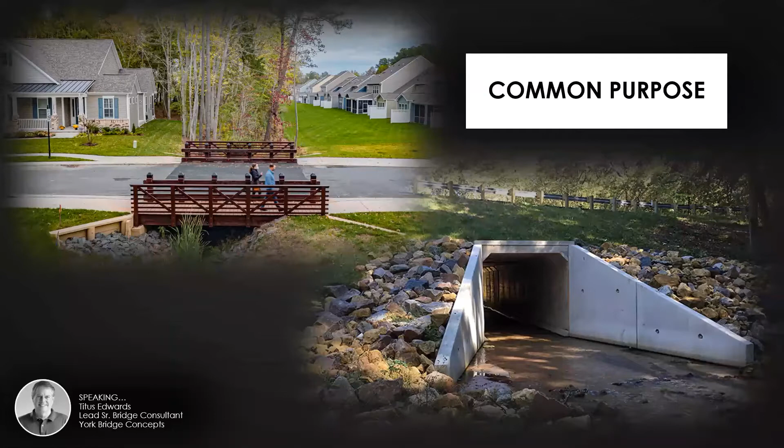And that kind of makes sense because culverts are typically the go-to pitch for an engineer when they have a crossing. I mean, after all, a culvert is typically looked at as the best type of crossing. It's simple, it's easy to install, it's cheap, there's no maintenance. We just throw a culvert in and move right on down the road.

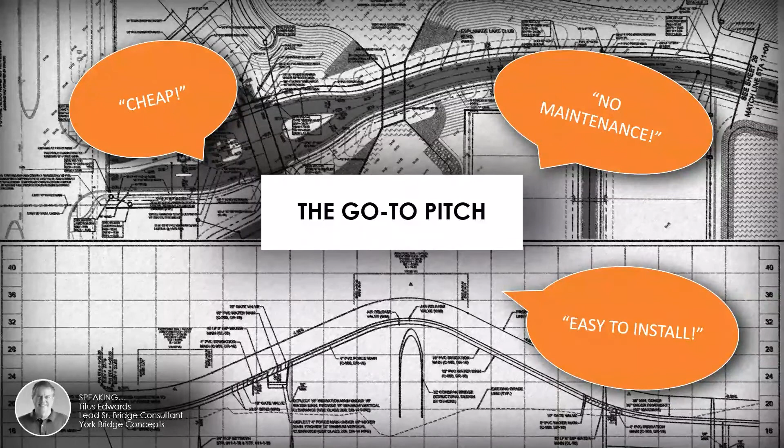In some cases, in many cases, that is true. If you have a small, insignificant crossing, sure, just throw a pipe in there, throw a box culvert in there, fill over it, and continue on. That would be a simple and easy way to go. But if you have a sensitive wetland, a larger stream, sensitive streams, now you may be looking at larger open culverts, arched culverts, bottomless culverts, and things may change. So you may want to consider a timber bridge, especially in those cases.

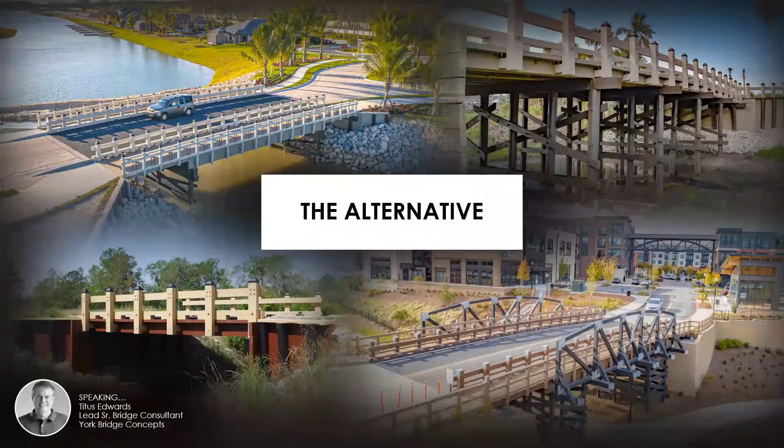And so today, I want to talk to you about some considerations that you may want to think about before choosing a crossing method, culvert or bridge. Well, the first point I want to make has to do with the environmental impacts.

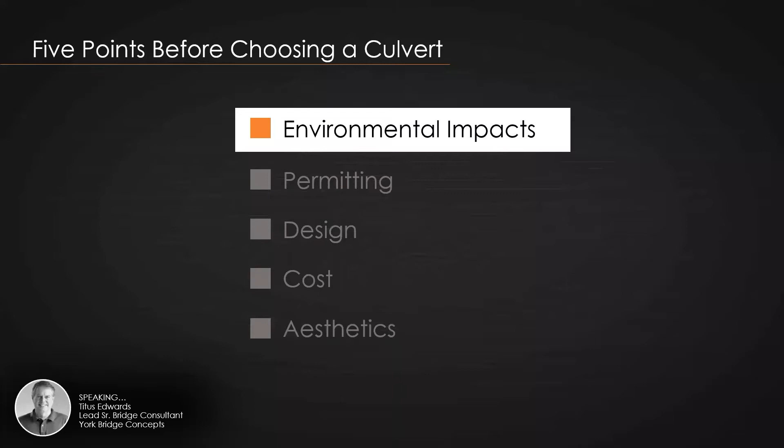First of all, from the production of the material. When you're dealing with culverts, you're talking normally about steel or concrete. Look at the factories where these materials are produced, the tremendous amount of greenhouse gas and carbon emissions.

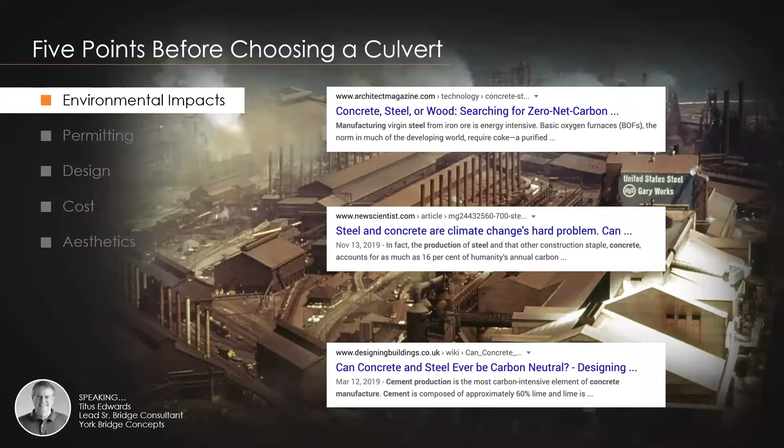The environmental impact of the production of the material itself is quite massive. But when you're talking about a timber bridge, you're talking about something natural and organic, very green friendly. The lumber comes from managed tree farms, and as we know, trees growing are very good for the environment, absorbing carbon dioxide from the air. So with a wooden bridge, you're using a material that's renewable, natural, organic, with a very small carbon footprint.

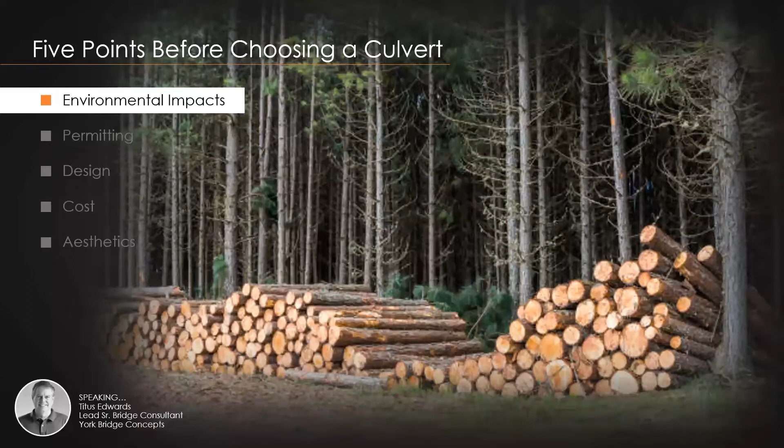But the second angle of the environment I want you to consider has to do with the installation of a culvert versus a bridge. Here you see a typical box culvert or multiple box culverts being installed for a stream crossing. Notice the massive impact of the crossing, where they've had to build cofferdams, dewater, put down a gravel base. You see the large equipment running through the crossing. It's a tremendous amount of impact to the crossing.

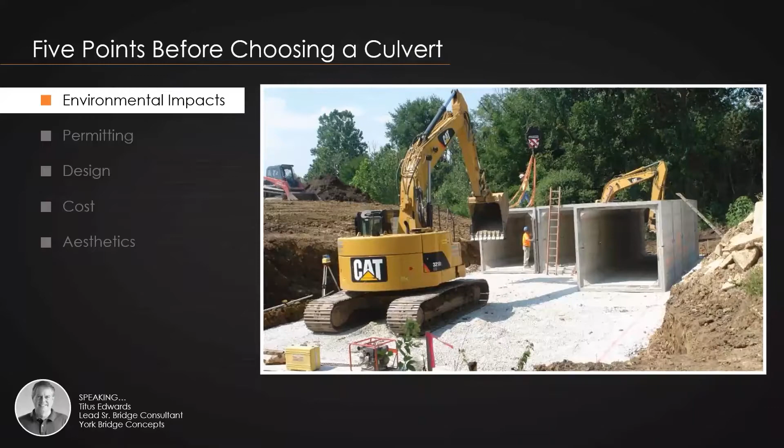But when you're talking about a York timber bridge, you're talking about timber piling supports. It's a very minimal impact to the crossing. So it's therefore much more environmentally friendly to install.

What you're seeing is a slide done by Eric Lass. Eric is a civil engineer we work with quite a bit out of Massachusetts, and he does a lot of solar farm projects. He was asked to evaluate box culverts, arched metal culverts, and timber bridges for these solar farms. Most of these were simple wetland stream, very small crossings. But look at the bottom right, his conclusion with the timber bridge: minimal temporary and permanent resources area impact.

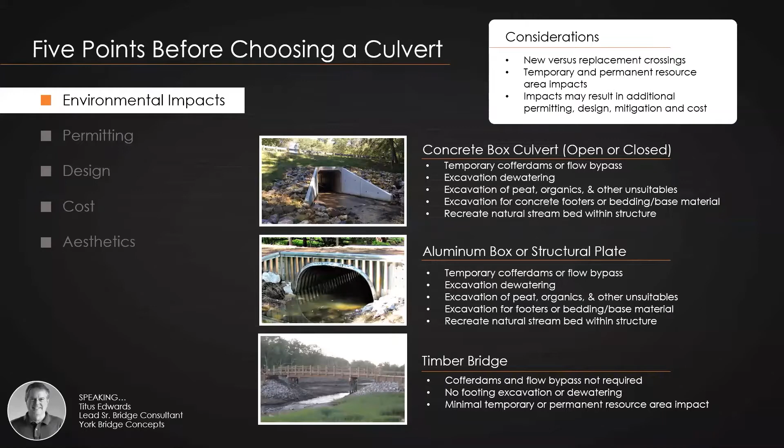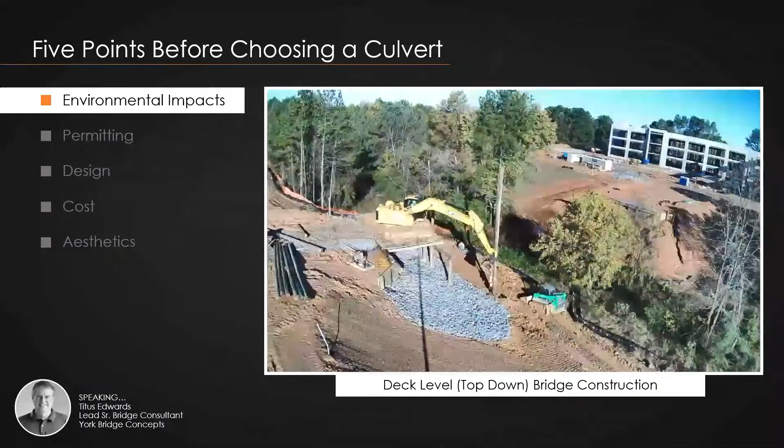And that's exactly true. Now there's another angle here as well. In this time-lapse video you're about to see, you can see us actually building a bridge. This is up in Marietta, Georgia, for an office complex called Edison Chastain. It's a 2-lane vehicular loaded bridge, part of the driveway leading up to the office complex. The bridge is a multiple span design, about 160 feet long.

But notice how we're building this. We're working from the deck of the bridge itself. York Bridge is known for its deck level construction method. You can see the stream down there in the crossing, but we're not down there at all. We're working off the deck to drive our piling and build the bridge. So it's a very environmentally sensitive and friendly method of installing a bridge.

So the next time you think about putting a culvert in versus a timber bridge, you may want to think about it from an environmental standpoint.

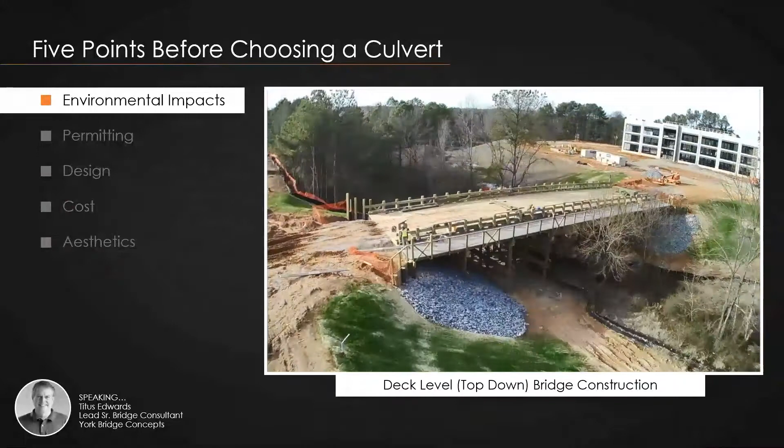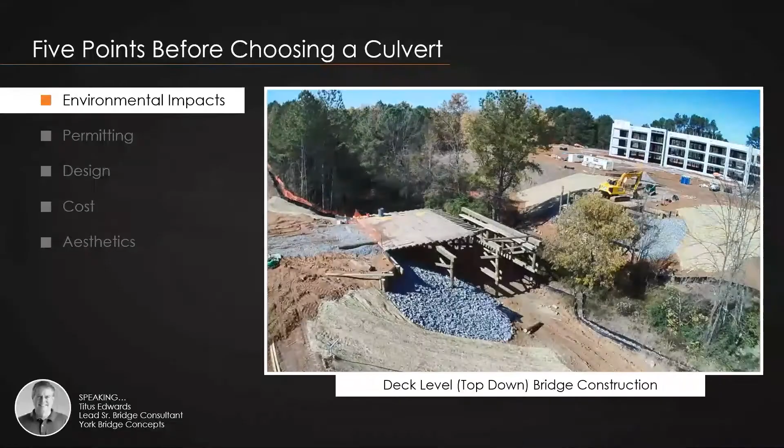You know, that is such a great point. And again, from an environmentally friendly standpoint, a timber bridge is going to be a good solution.

Well, I want to suggest another consideration: timber bridge versus culvert. Think about it from a permitting standpoint. Typically, trying to obtain a permit for a culvert is a very difficult, long-term, and expensive proposition. There's a lot involved in getting a permit, whereas getting a permit for a timber bridge is typically much quicker and easier to obtain.

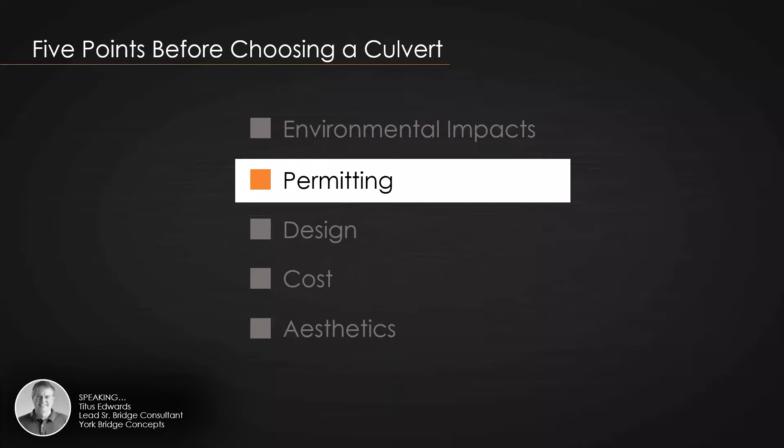And the reason is what we just talked about a moment ago. It's the impact. The environmental impact is so much more massive with a culvert compared to the timber bridge, where you're just driving those timber piling into the ground.

Here again is this slide by Eric Lass doing the comparison, but look at the bottom, his conclusion. He uses the term simplified permitting with the timber bridge. And that's the way it'll work in many, many cases.

As a matter of fact, I understand the Army Corps of Engineers doesn't even consider driven timber piling from the deck of a bridge as impact to a crossing. Therefore, they will typically allow bridges to be built under their nationwide permits, which makes it much easier to permit. Today, with the way permitting goes, it can become an important issue.

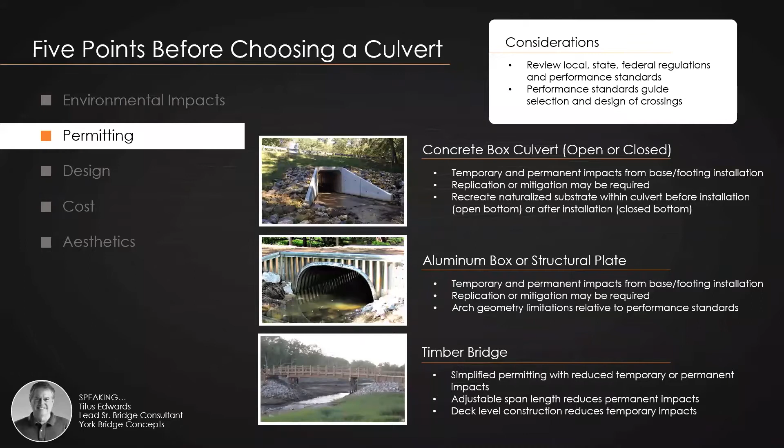When I first got the drawings from the engineer, they'd already drawn in multiple culverts for this particular crossing, but it was going to raise the flood elevation 13 feet. They would never have been allowed to permit and build a culvert in that fashion. We were able to build a timber bridge there, and we're going to show you more about this bridge coming up later on.

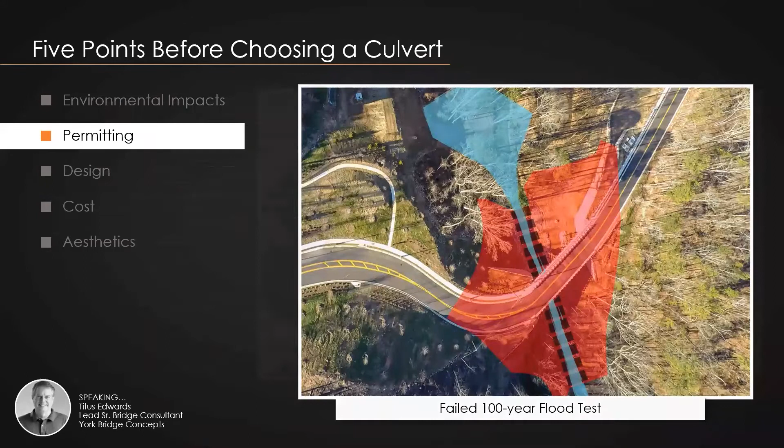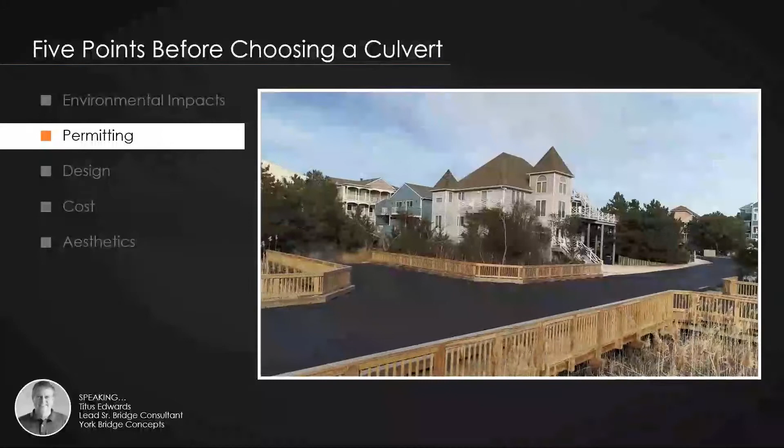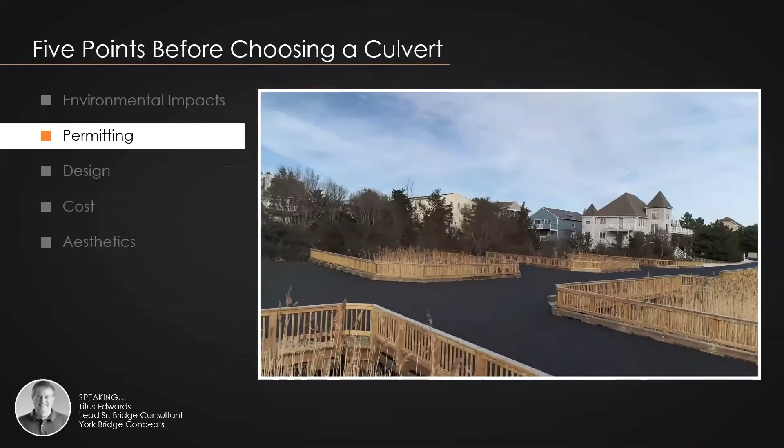They even brought in a structural engineer who designed a metal bridge with openings like a metal grate that water could flow through, and he was going to try to use that for the deck. Finally, they brought in a wetland consultant named Jim McCulley, and he knew of us. He suggested to the Army Corps a York Bridge deck level construction methodology with no impact to the wetland, so they could build the bridge.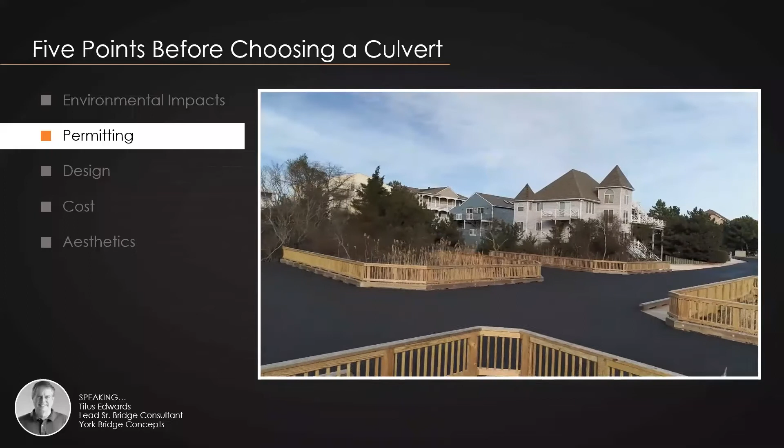And I love that we were able to provide that. When you look at this video, you can just tell that the bridge fits the development like a glove. So I think it's a win-win in that way.

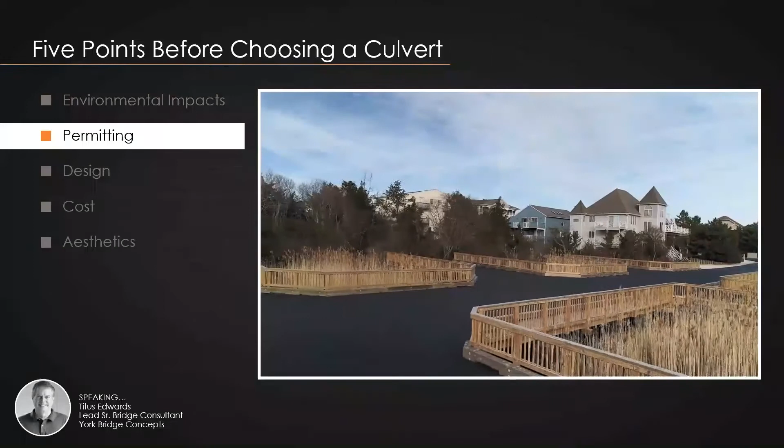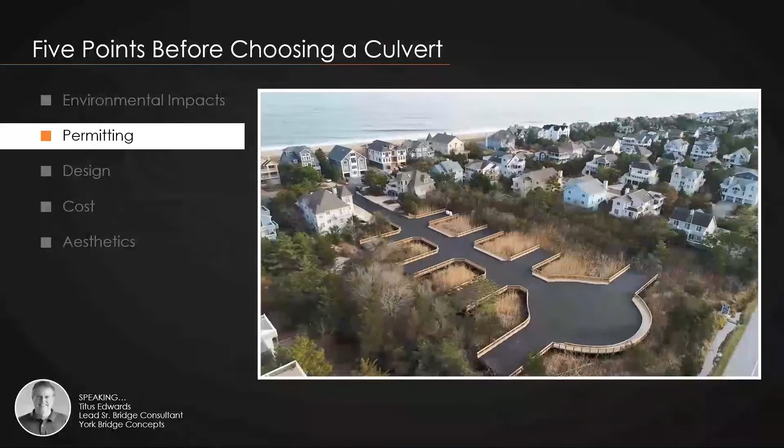And I love this one. Beautiful design. It worked out very well from the environmental standpoint and was able to be permitted by the developer. So think about permitting - a timber bridge may help you out there.

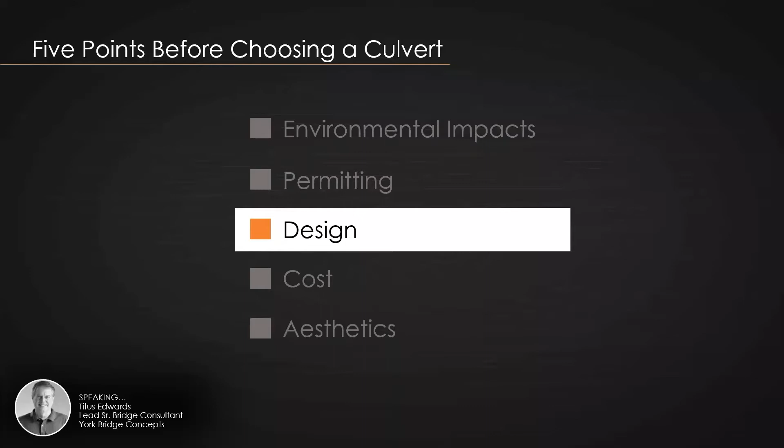A third consideration when you're thinking of culvert versus timber bridge: think about the design. By design, what I mean here is the spanning solution for the crossing. We have a lot of different spanning solutions that we utilize - we're actually going to have another webinar dealing with that. There's a lot that goes into it: the flow of the water, the flood elevations, what is allowable, soil conditions. Many things go into this.

But what a bridge will enable you to do is open up a crossing, allowing for greater flow of the water instead of impeding it many times, which a culvert can do.

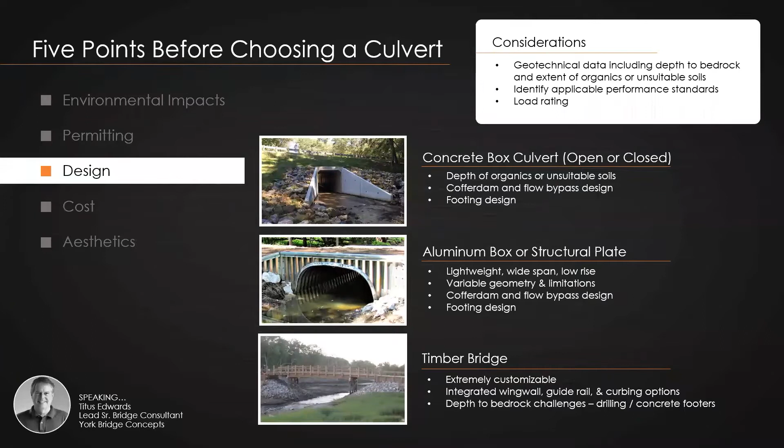This is a residential subdivision. They built it out, and they had this trail that went around it. Notice what they did - they got permission to just throw in a couple of pipes through this wetland area and little stream, and then they just put an asphalt trail over it.

This wasn't in more than 2 or 3 weeks before they had some rain and a little bit of flooding, and look what happened - it blocked up, flooded, eroded, and damaged all of this. Well, they tore it all out. We ended up building a couple of timber bridges for them, and it opened up the flow and worked much, much better for the spanning solution for the crossing.

So that's what I mean when I'm talking about considering the design and the spanning solution - a bridge will open up that crossing so much more for you, where many times a culvert can become an obstruction in and of itself, creating flooding, leading to erosion.

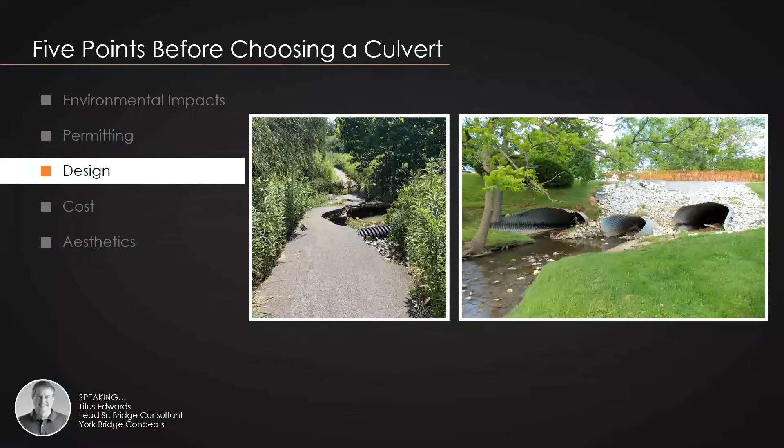We ended up with a 3-span design, with 2 piling bents in the crossing. We spanned over the stream, and also over a sewer easement to the right. It worked out very well. We were able to put these spans in without impeding the flow of the water. Whenever it rains and floods, the water can still flow through without creating any impacts or problems, as the culvert design originally would have done.

So when you're considering a bridge or culvert, think about the span and the flow of the water, and how a timber bridge will help with that.

Number 4, I want to talk about cost. A lot of people may be surprised I'm bringing this up, but that's typically the first question we get: how much does a timber bridge cost? Now, I'm not going to tell you a timber bridge is always going to be cheaper to build than a culvert. That's not true. If it's a simple, easy box culvert or pipe, yes, they're going to be a lot less expensive than any type of bridge system.

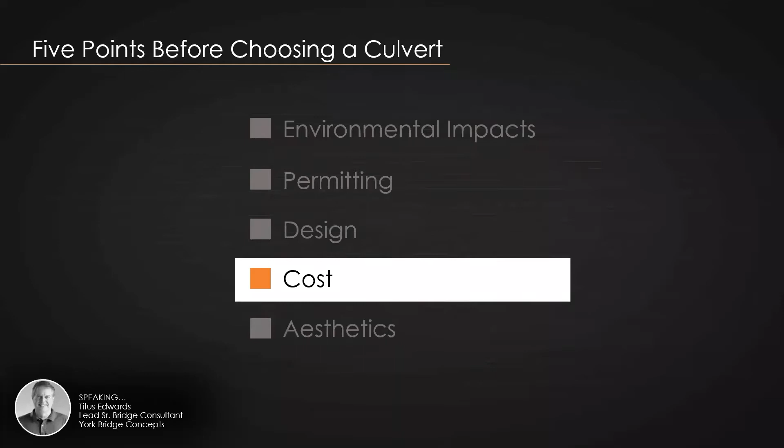But there are times when one of our timber bridges may be able to save you some cost. Eric had a slide comparing the culverts and the bridge, and he came up with the cost analysis, determining that the timber bridge was actually less expensive than the other two options.

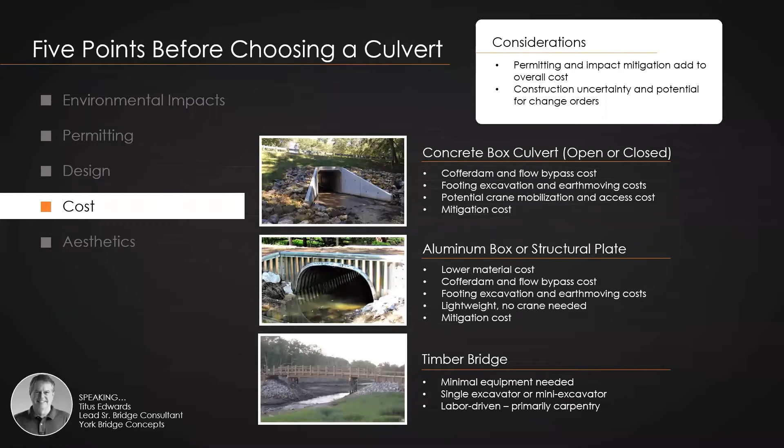What's interesting is people will call me up and say, hey, I got a price for a culvert, it's $60,000. And I say, well, the bridge is going to be about 200. Oh, that's so much more, they say. But what they're thinking of is only the material, not the full installation. When we're talking bridge, we're talking full design-build, everything out the door, pretty much turnkey, not just the cost of the culvert itself, because the culvert has to be installed. That's typically where most of the costs are going to be found.

We've talked about the cost comparison slide. In this case, this is just a little vehicular bridge for a solar farm. The timber bridge turned out to be less expensive than the installation of the aluminum arch.

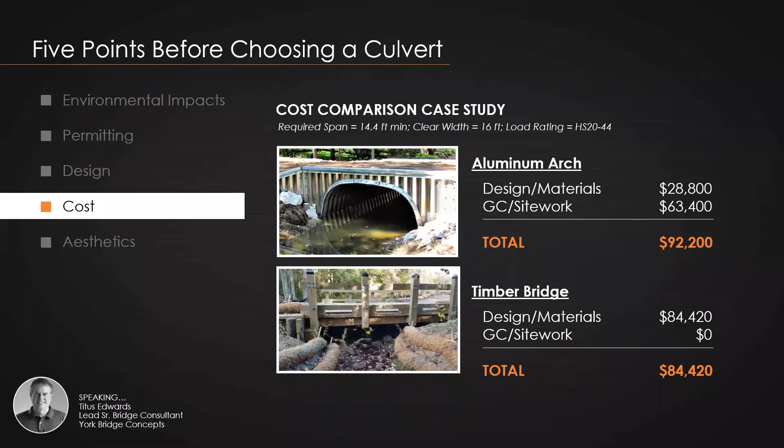We've talked about this inspired living bridge, and I want to go back to it again. Here are some of the original drawings, and you see the multiple culverts they were originally looking at for the crossing. What was interesting is a site contractor priced installing those culverts the engineer originally designed. The cost: $900,000.

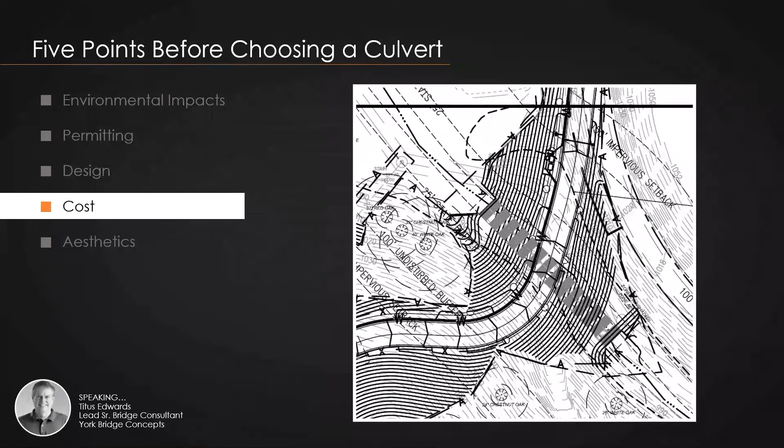We built that bridge you saw earlier, a 2-lane vehicular bridge, turnkey out the door, for $700,000. So we were able to save the developer a couple hundred thousand dollars. Here's a perfect example where the timber bridge and the design we utilized was able to be cost effective for the developer.

I think our next slide shows the bridge. Here is that same bridge from a different angle. You see what a beautiful bridge it is. The design worked, it worked from a permitting standpoint, and it became the best solution, even saving them money as well.

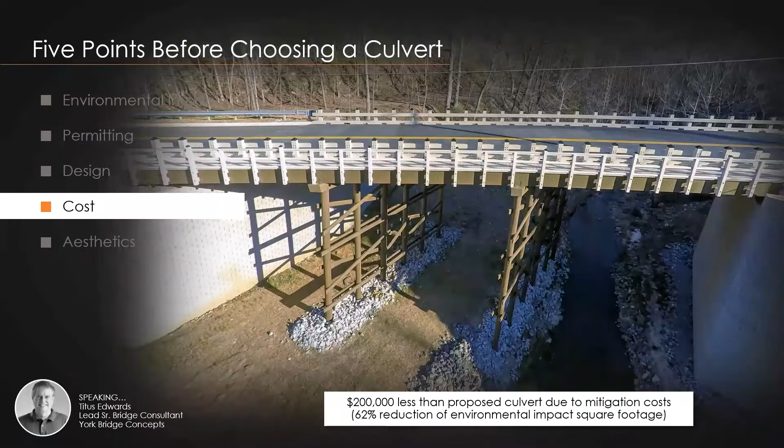The next picture, you're going to see our Coconut Point bridges. This is a mall project, a shopping center down in Estero, Florida, in the Fort Myers area, right off of Highway 41. We built 2 vehicular bridges, interior within the shopping center, to access the internal roads and parking areas. This is a 100-foot bridge in the foreground; the other bridge is a 300-foot long vehicular bridge.

What's interesting is the engineers originally designed multiple con-spans, bottomless concrete arches, for the crossings. They had to de-water, by the way, to install them, with an estimated cost to install of $4.5 million. We completed both of these bridges back in 2004, 2005, for less than $2 million.

This is a Simon Property Mall, and we saved Simon Property $2 million by building the bridges instead of the culverts. By the way, Seattle, have you ever been to a mall? Just a few times, right? Well, if you ever go down to this area, you'll need to go to this mall. It's a beautiful, beautiful mall.

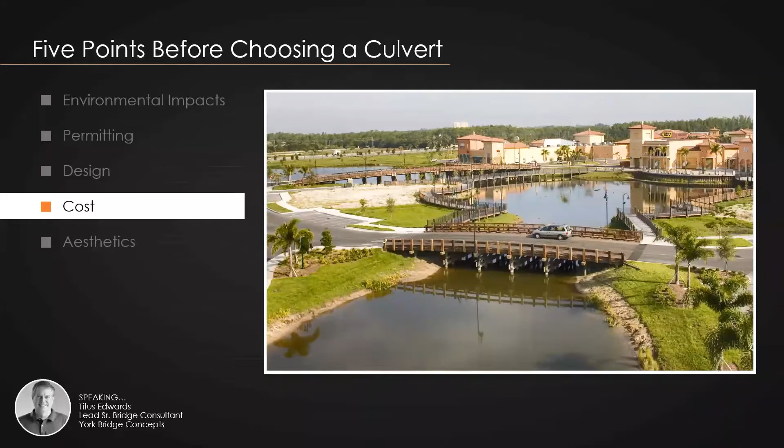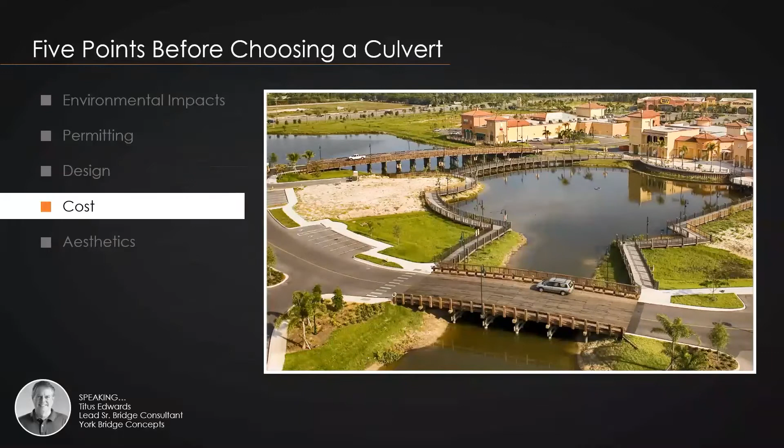So again, I'm not trying to say timber bridges are always less expensive. Don't get me wrong, sometimes they're going to be more expensive. It depends upon the crossing, but there are times it might be less expensive. It's certainly worth a call or contacting us so we can at least take a look and give you some ideas and solutions from that standpoint.

And that brings me to the last point I want to make.

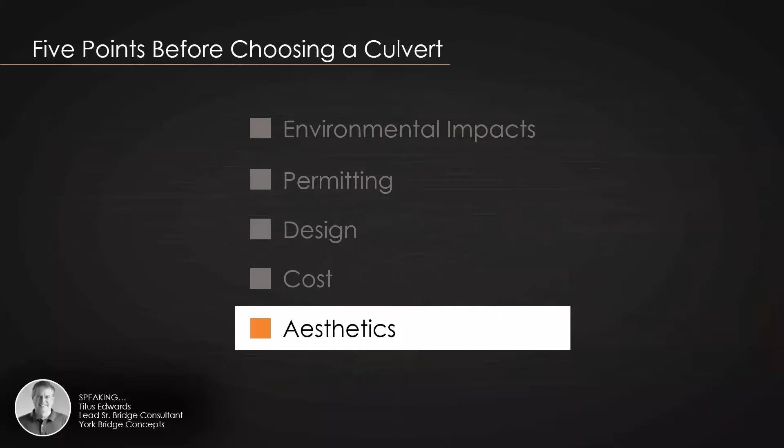When you're considering a culvert versus a timber bridge, you might want to think about the aesthetics. It's interesting that with a culvert, they're really best not seen. They're very plain, sometimes downright ugly. Sometimes we've even seen where they'll try to dress them up with stone facing or brick facing and columns to make them look prettier.

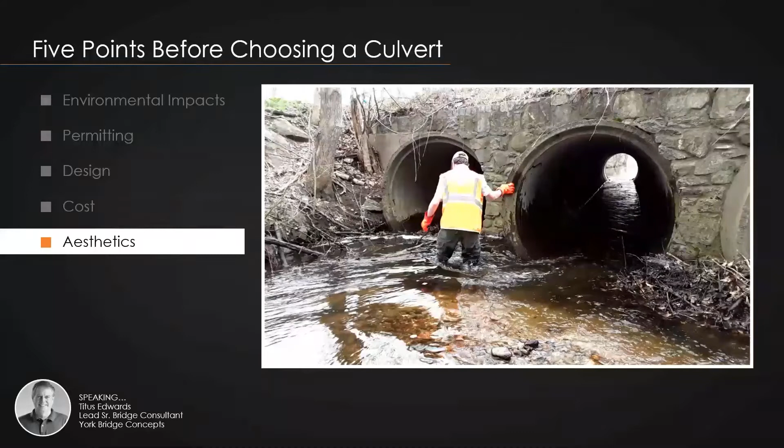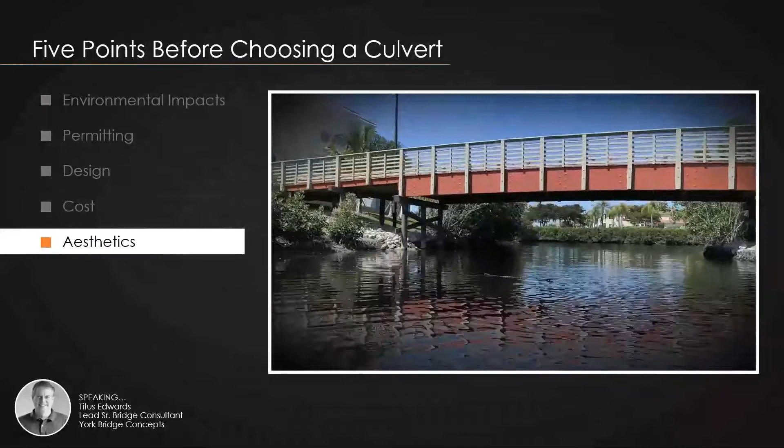But with a timber bridge, the aesthetics come with the material itself. A timber bridge is beautiful. It's interesting, the Coconut Point bridges I mentioned — when they opened up the mall, I went to Indianapolis and did a presentation for Simon Property where their headquarters are. They told me thousands of people were coming in to see this new shopping center, and they were all talking about the timber bridges. The aesthetics — people love timber bridges.

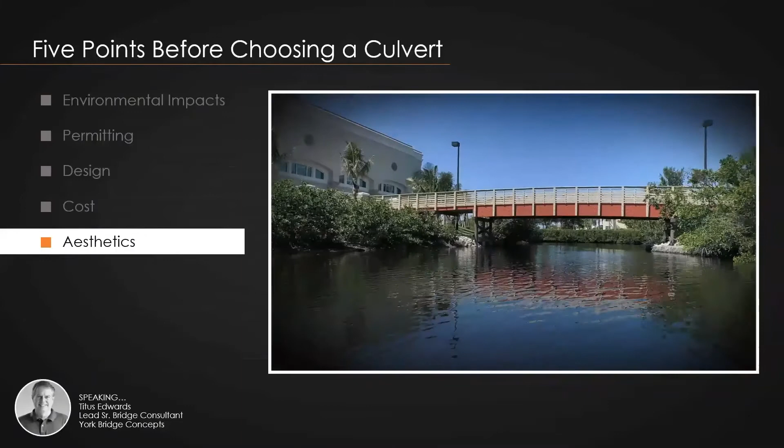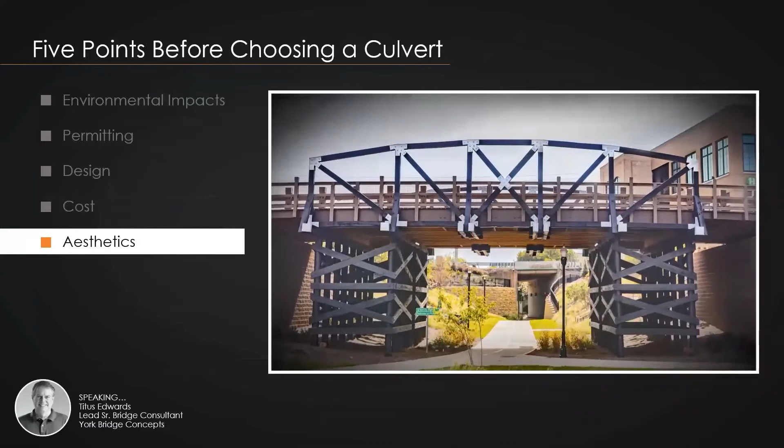There's a natural warmth and charm that comes from these timber bridges. You can see with York Bridge, these are elite, gorgeous, iconic, legacy design timber bridges. That's what we do here at York Bridge, everything being custom designed. So you may want to think about the aesthetics, especially if the bridge is in a very high profile area where a lot of people are going to see it. You just can't beat the aesthetics of a timber bridge.

The video you're going to see next — actually, we're going to see the drawings first. This is our Esplanade Lake Club project. I received some drawings from Waldrop Engineering, and this is what I saw when I opened it up. You see in the profile view at the bottom, they drew in a conspan, a culvert for the crossing. You can see it on top in plan view.

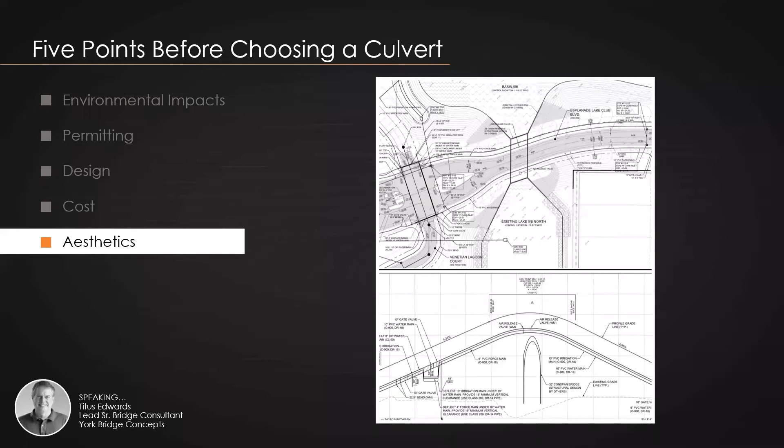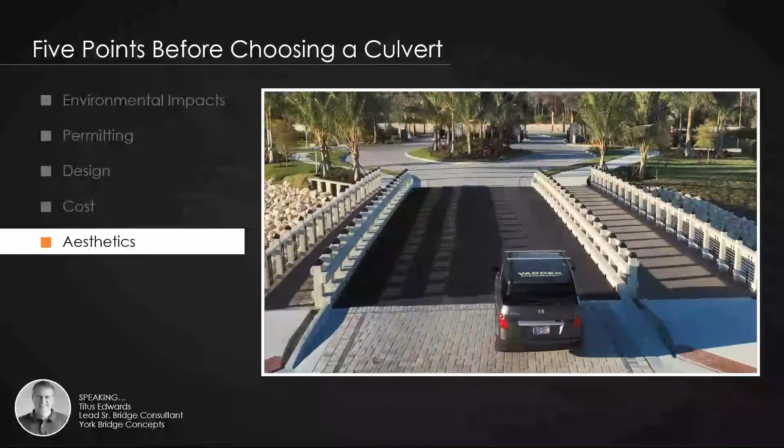And then we have all of our protective finishes on the wood. Look at the handrail on the outside — we worked with Waldrop Engineering's landscape architects and came up with a beautiful, special looking design. All of this, and the colors, were to match the California theme for the overall development.

And this is the entrance road coming in that people drive over every day — very high profile. They wanted the aesthetics, and the design worked. Actually, it worked within their budget from a cost perspective. And look at what they got — what a beautiful amenity feature that was able to solve their crossing problem.